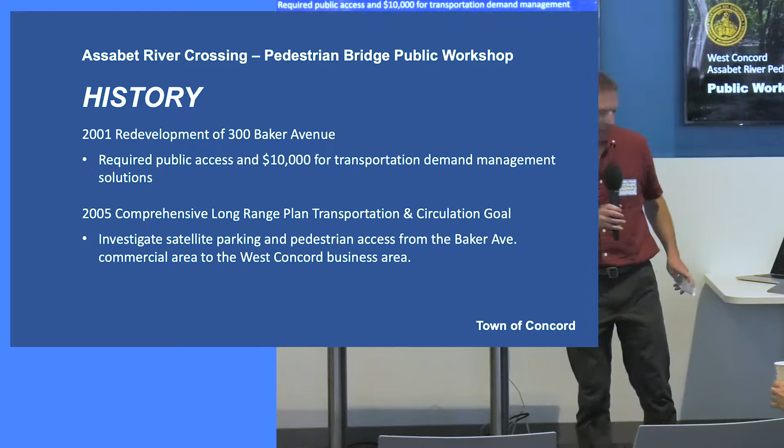So this is the part I agreed to give, just a few slides on history. How did we get to this point?

This is not necessarily a new idea, although it may seem new to many of you who are just coming to this, but as far back as 2001, when this site was redeveloped, some forward-thinking members of the town staff and the community had the wisdom to ensure that public access was retained along the banks of the Assabet River, as well as a conservation easement.

Even back then, there was thinking that perhaps some connectivity between this site as it got developed and the West Concord Village would be useful. So they retained that conservation easement and public access, and they also were able to negotiate $10,000 in funding for transportation demand management. I'll talk a little bit more in a minute about where those funds were used.

But a few years later, in 2005, Concord, which periodically does a comprehensive long-range planning process, revisited this goal of thinking about transportation and circulation goals between the village center and this site.

And they actually expressed a specific goal around looking into funding for a feasibility study. Again, in thinking about perhaps at that time satellite parking for the village center over here, and pedestrian access for the Baker Avenue development and the commercial areas of West Concord.

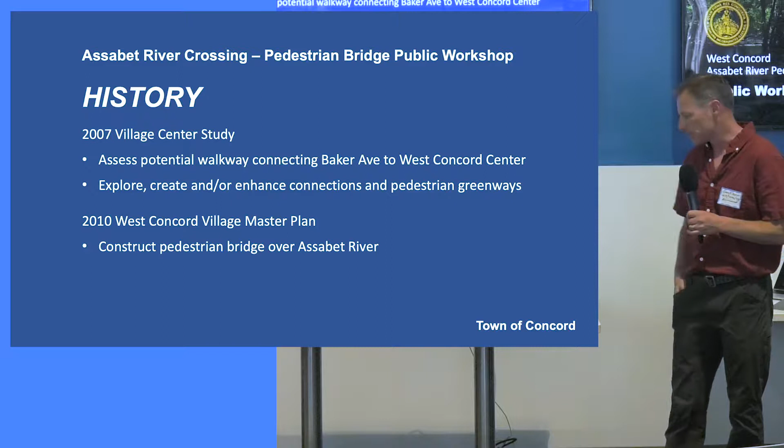Now in 2017, just a year ago, you remember I was talking about some funding, the $10,000 for transportation demand management. Well, we finally put that money to use and did a feasibility study.

This feasibility study looked at a 1,000-foot stretch of the Assabet River between Baker Avenue and the West Concord Village, identified 4 potential crossing locations, looked at a range of different bridge options, a trestle bridge, a truss bridge, a beam bridge.

And basically explored in this feasibility study some of the trade-offs between the number of footings that would be required for each type and the costs, ranging from between $2 million, $3.6 million. So a lot of considerations there, but we had the feasibility study done.

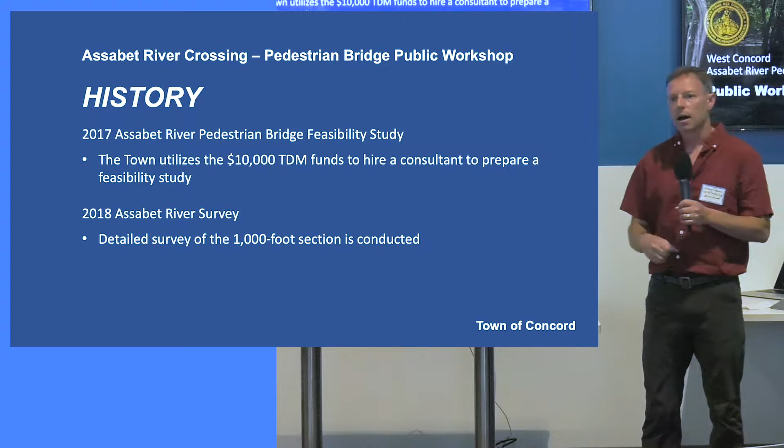In 2018, building on that work, the town did a detailed river survey of this same 1,000-foot stretch of the river to basically understand exactly where footings would be required, with detailed topographic surveys of the depths at different locations along the widths, the areas of wetlands, and where access would be more challenging and easier.

And then, of course, also last year, I'm sure everybody is aware that the Long Range Plan Committee published Envision Concord Bridge to 2030. And in the open space section of that plan, we again included some specific goals around ensuring that the village centers were connected to open spaces.

Along with a specific recommendation to pursue funding and achieving a pedestrian access between Baker Avenue and the village center, we also looked at connectivity along village riverways, including the Assabet River here in West Concord and Mill Brook in Concord Center, the Mill Dam area.

So I think that's the end of the history. I'll just end on this slide talking about where do we go from here. The next steps, obviously, now that we have a feasibility study, what would be a final design?

Develop the construction drawings, permitting. We have some estimates for the cost of that. The plan is to tap the community preservation funds, the CPC, to try and take us to that next step. And then, of course, construction would require a significant fundraising effort.

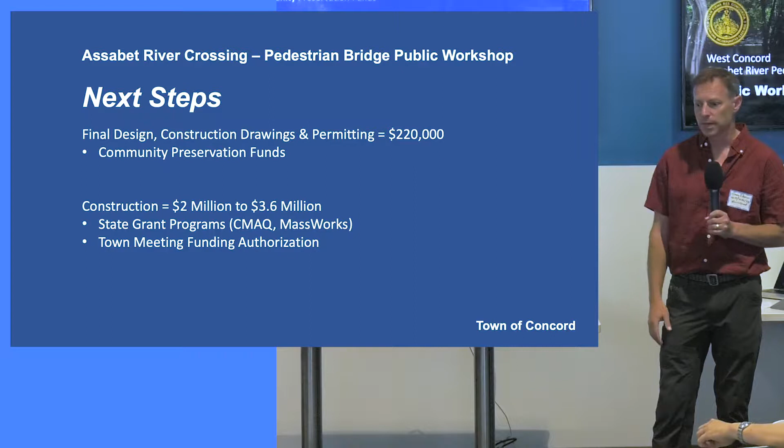But I think, to the extent that we can leverage state and federal grants, that would be a better way to try and fund this. But we're always open to private gifts if somebody happens to have an extra couple of million or knows a company or corporate sponsor that wants to bring this vision to fruition. That would be wonderful.

So I'm going to stop there and hand it over to Grace and James to take it from here and talk a little bit more about what our next steps might look like.

Great, thank you. Oh, I don't need this. Okay, let's put this over here. They've hooked me up with a... I'm wondering if you can hear me though. Is it? Am I projecting all right? We have lav mics. Okay, can you hear me? Is that okay? A little louder? Okay, well, I'll raise. You can also come closer.

So I will just introduce ourselves. I'm Grace La. This is James Dallman. We're both partners and co-founders and principals of La Dallman Architects. Our practice began in 1999.

Just to tell you a little bit about us, we came to the Boston area in 2013, where we opened our Boston branch of our office, which is now the headquarters of our operation for architecture, urban design, and infrastructure. Part of the reason that we came to the Boston area is we actually did our graduate work and my undergraduate work at Harvard University, where we actually met.

And since that time period, in 2013, when I arrived, it was partially because I was invited to be the director of the architecture programs at Harvard University's Graduate School of Design, where James and I have both been teaching since.

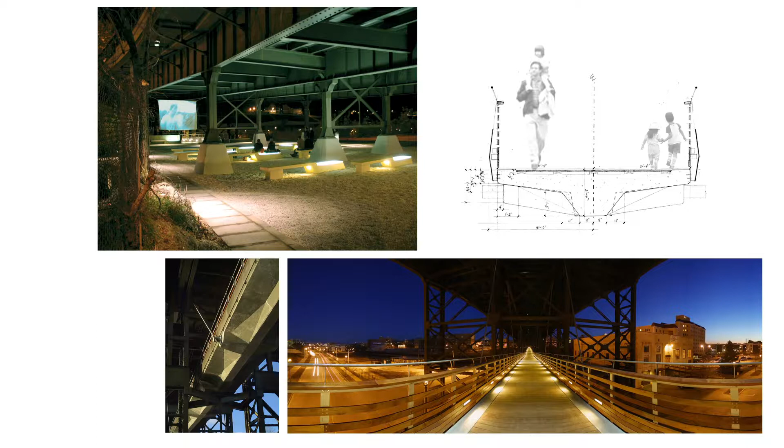We've done several bridge projects. Again, it's been something that we've been very interested in. And in fact, this project here, which is the Marsupial Bridge located across the Milwaukee River in Wisconsin, was funded in large part by CMAQ funds.

So we have been very engaged in the process of helping communities actually also find that funding. We know that these are expensive projects. But I think there are resources, and we've been very successful at assisting with the grant writing process as well, because a lot of the material that we will share with you today will work into a document that could actually become the working documents that we put forward for any grant funding that you might pursue.

I think the major goal of many of our projects has been to seek a very powerful symbolic sense of civic space and belonging as part of our mission of our practice. So it's kind of self-evident, but the project objectives include this connection.

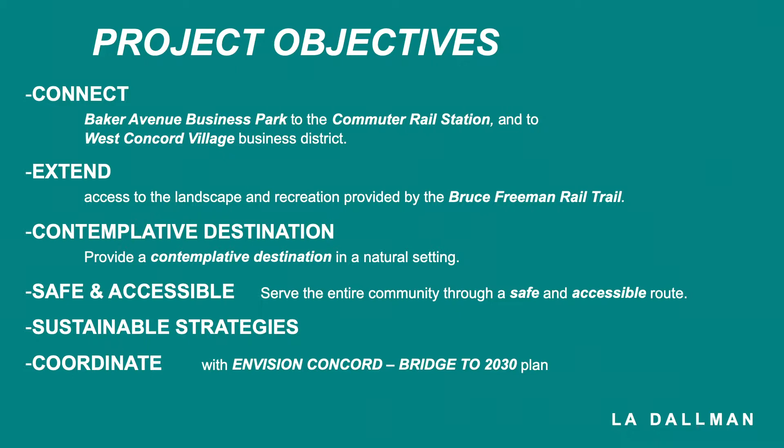This very important potential connection between the Baker Avenue Business Park, the commuter rail station, and the West Concord Village Business District, extending access to the landscape and recreation provided by the Bruce Freeman Rail Trail that's now been put in place, to create potentially a contemplative destination, a place to get away, a place to get into nature, make it safe and accessible. That's very important.

Bridges can be seen as kind of off the beaten track, so they should be made well illuminated and feel very safe and open. Sustainable strategies should be involved to the greatest extent possible, but in particular, when we make better connections for pedestrians, we're improving quality of life, but also creating more sensible commuter possibilities.

And to coordinate with the Envision Concord Bridge to 2030 plan, to make it integral to the community's vision for the future.

Some Concord context - we noticed that the website features a bridge, I think it's the old North Bridge. There are demographic shifts going on in the community that we want to respond to in terms of change in age of the population, but also a kind of fit between development and workforce and access to the surrounding amenities on the site.

And in particular, to this sense of connectivity to the West Concord Village Center. In response to the Envision Concord 2030 plan, this notion of balancing change with tradition, responding to a thriving community that is changing, and in particular, evolving transportation needs and connectivity.

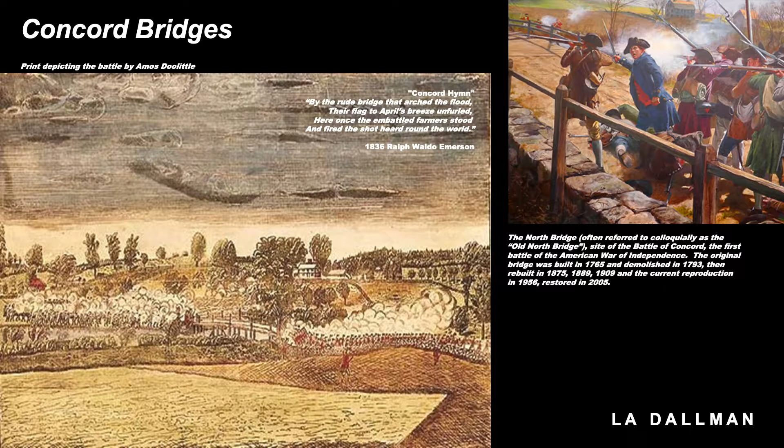Concord bridges are part of, I think, the ethos and history of the community. There's a kind of consistent presence of bridges throughout the community, crossing small waterways and roadways, but also part of the history of Concord itself.

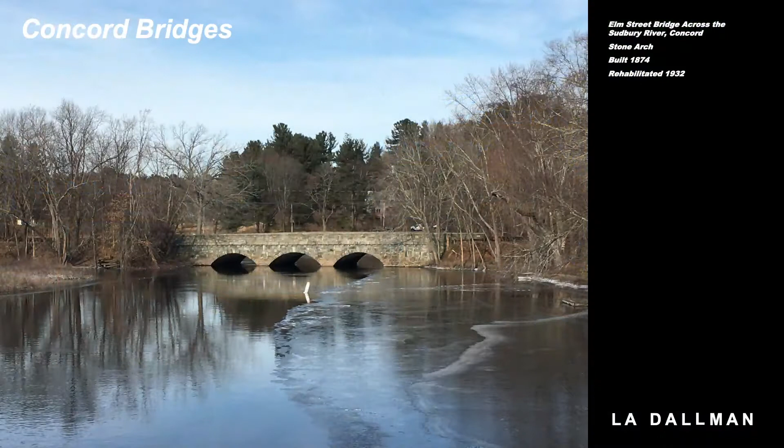That's the North Bridge in various manifestations - it was rebuilt 4 or 5 times. It was fun for us to survey and catalog the kinds of bridges in your community, to get to know the full range and actually the varied types, from stone arch bridges to steel bridges.

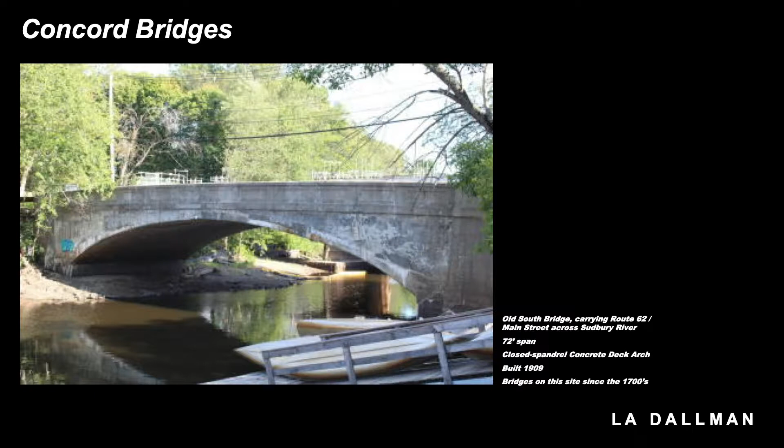It's been an interesting... so railway bridges from the 1870s, concrete structures, and timber as well. So there's every type of bridge, but I think we all know that this part of the community is not well connected in this immediate vicinity.

So some existing site information that we think is very critical to this process, that's based on the feasibility studies and the Bruce Freeman Trail.

So I need to raise my voice a little bit. Yeah, it's hard for me, so I'm sorry. I'll try - is that better?

The Bruce Freeman Trail is a very interesting connector through West Concord, providing access to recreation and natural landscapes, and obviously connects directly to the commuter rail and to the center of town.

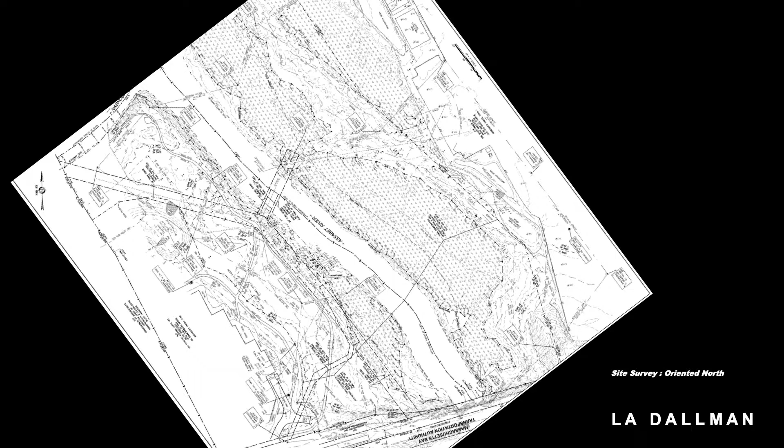The area of interest, of course, is here between this building and West Concord Town Center. The survey work that was done was very important to unleash the sense of the constraints, the parameters, and the opportunities for where best to place crossings across the river.

And we looked at various cross-sections and placements of potential bridges along that cross-section of the Assabet. It's obviously a very beautiful destination that changes throughout the year, but it's also full of wildlife, clearly. This is a view across one of the potential crossing points for a bridge.

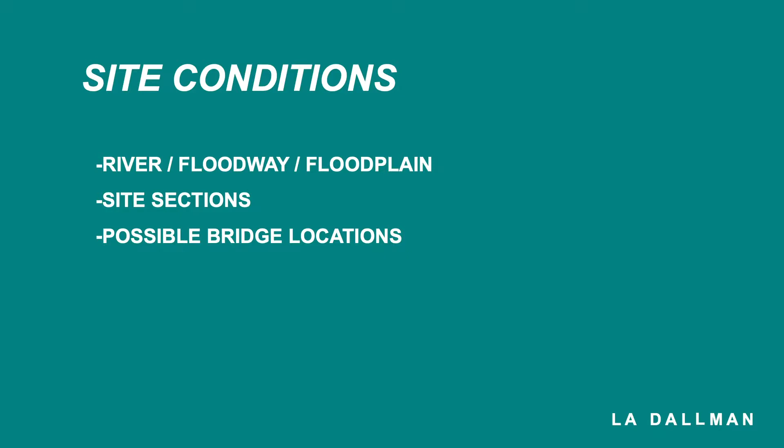So we looked very specifically at these site constraints from the survey, which are the kind of starting point for designing any bridge on this site.

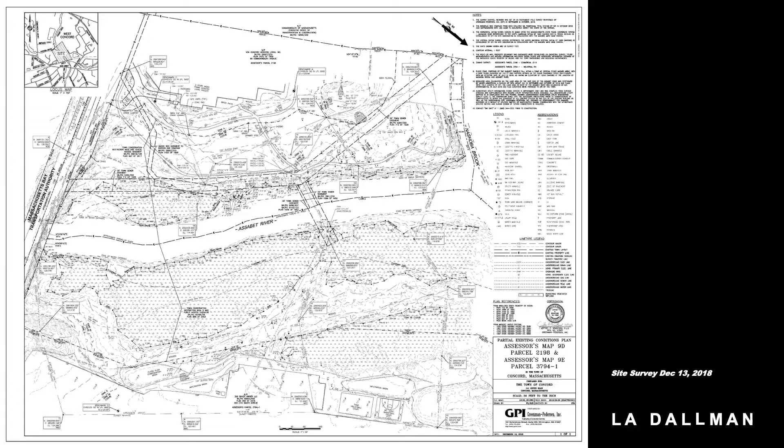So what we did was, this kind of site survey is often a little bit difficult to read, so I hope that this might clarify some of the existing conditions. We've built up in layers a kind of graphic mapping, just to get a sense of where north is - this way on this particular one - we're going to actually shift at a moment the orientation of the drawing.

But of course there's the river itself. Then there's bordering vegetation along each of these, which is outlined here. These are the defined wetland areas. And of course the tree canopy.

100-foot inner riparian, the riverfront floodway, area for habitat, riparian habitat. I want to show you.

This is at the mean annual high water mark. We're going to revisit this drawing a couple of times because it's quite important. This area defines what we're referring to as the floodway. And the floodway—of course there's the river itself—but the floodway is the area outside of the river where you will have intense water flow.

I'll point out that the commuter rail is kind of a nozzle, a point of constriction of the flow of the river. So at that point, the floodway becomes very narrow but also very intense. As it stretches out and spreads over the site, it broadens. This becomes a critical issue because though the floodplain is much broader than the floodway itself, the floodway is where the most intense hydraulic pressure is during a flood event. So that's the area we need to keep most clear of any obstructions.

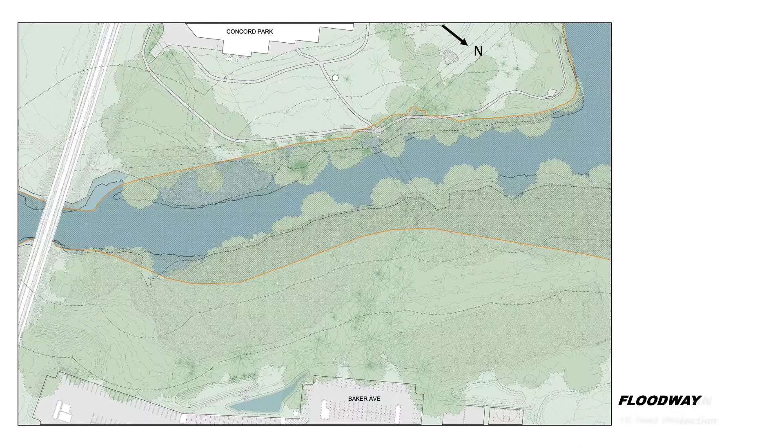This is a kind of plan diagram of a 10-year flood, and then of a 100-year flood.

So, sorry, just zooming in and looking at the village itself and the surrounding areas. This was from the master plan. You can see the location of the 4 possible bridge sites—one next to the MBTA, 2 more further up, and one at the very neck of the Assabet River where it meets the Nashoba Brook. So those were 4 obvious possible locations spread out across the site.

But in terms of access from the village, there are some key points. Along the commuter rail to the south edge, straight across the main new set of developments and the drive that passes through that site, and then further north, just before the Nashoba Brook, where the Bruce Freeman Rail Trail meets the Nashoba Brook.

From this side of the site, there are potential connections you could imagine all along this edge, but there's one that's particularly prominent, which we'll describe a little more with some photographs. There's a very clear shot through the forest, essentially from this point in space all the way through to the Assabet River, which is a clearance that was made for some sewer lines—I believe it was cleared for that purpose when they put the sewer line in, but it is a very clear path.

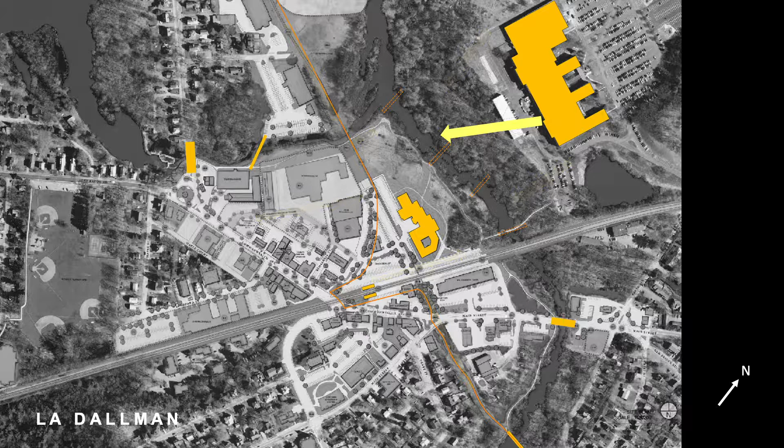If we focus on this side, from this vantage point—if we were standing on that deck looking out towards the Assabet River—you can imagine yourself moving in a pretty straight line past the parking lot, out into the forest, and through this clearing, this line of clearing in the forest that leads all the way to the river. So that's one potential route from this vantage point.

If we turn around and go to the other side, this is the connection point that might be right at the Nashoba Brook, just where the Bruce Freeman Trail crosses the Nashoba Brook and leads through that conservation area.

If we were to imagine those 2 connections meeting in the shortest possible route, it might look something like this, where you'd pass through the conservation area along the river edge, cross at a relatively short crossing, and then move in either direction, making the shortest distance between 2 points.

Another possible route is based on the southern edge. If we imagine moving across the edge of the commuter rail line, and then from this vantage point, moving across the edge of the parking lot towards the south—those are the 2 views one would get. It's a pretty straight shot, which would end up in a bridge across the southern edge of the site near the commuter rail line.

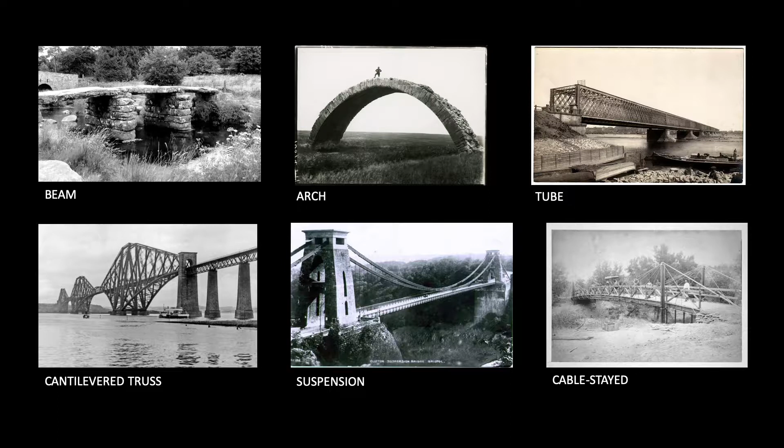We tried a number of bridge concepts, thinking through it. There are, of course, many different structural types one could use and think about—you have your own catalog of these in the West Concord region. The feasibility study identified 3 types as the possible options. The 3rd type, the trestle bridge section, we eliminated because it would require so many foundation points into the waterway, which is not good for the floodway issues and wouldn't make sense.

However, these 2 strategies, in which there's either a beam connection or a truss spanning, seem to be optimal structural strategies that we could begin to think about.

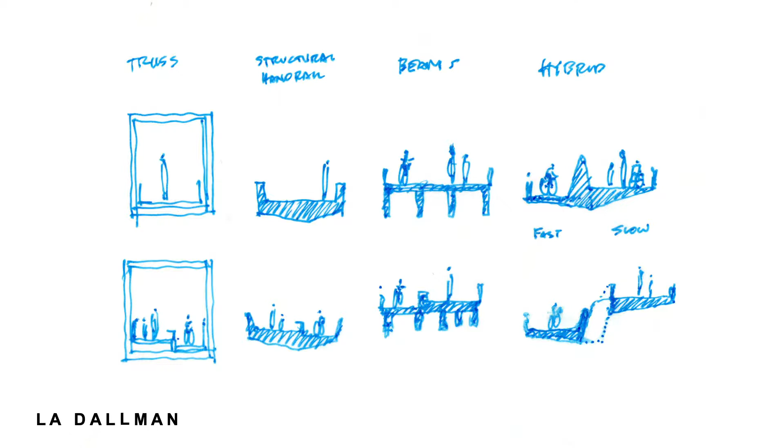If you take the cross-section in the other direction, the different structural strategies result in different kinds of cross-sections in the short orientation. A truss would create a little bit more of a volumetric expression of the structure, but it's actually low beneath the deck. In others, you would get much more depth, and you might need to raise the bridge a little higher. So the choice of structural strategy really affects both the aesthetics and the quality of the bridge, its height.

So what we did was, given that we were preparing for this workshop with you, we looked at 3 different strategies which attempt to look at different structural approaches so that we could elicit from you your thoughts and the pros and cons of each, and also test different sites.

So again, these are the 2 that we thought were the most optimal in terms of thinking about how we might approach a bridge project.

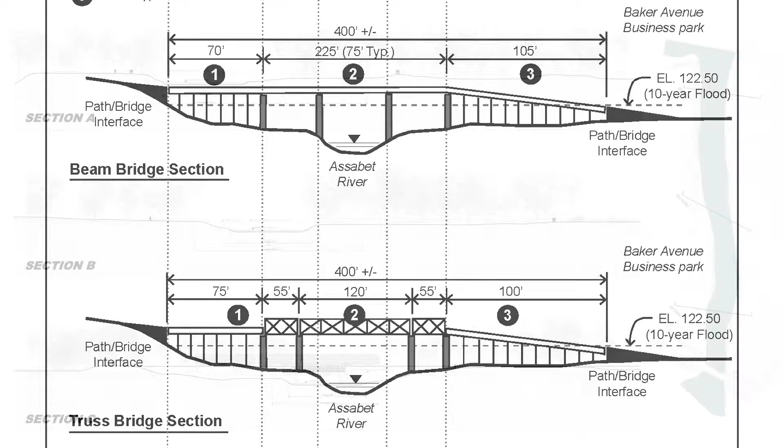And then when we look at the sites, on the right-hand side, you can see an actual plan of the river at this location, and these sections correspond to different points of the river.

What we'd like to point out is that when you look at section A - it's kind of hard to see here - this is a cross-section taken very close to the point. Maybe you could just point out where it is. One of the challenges of that location is that it produces the largest floodway span at that location.

So what we thought was perhaps we should focus our study on the other 2 possible locations for the bridge crossing.

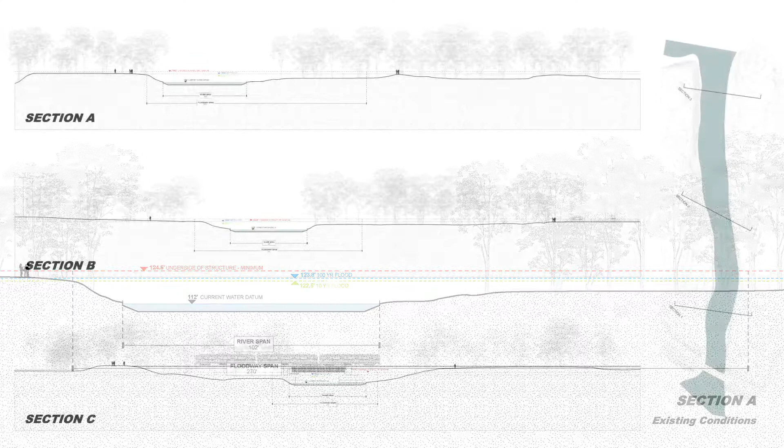In other words, we're ruling out crossing the Assabet close to the Nashoba Brook because it involves such a broad floodway to traverse that it's going to create more problems with regulations, but also structural spans. It becomes the longest bridge in a way.

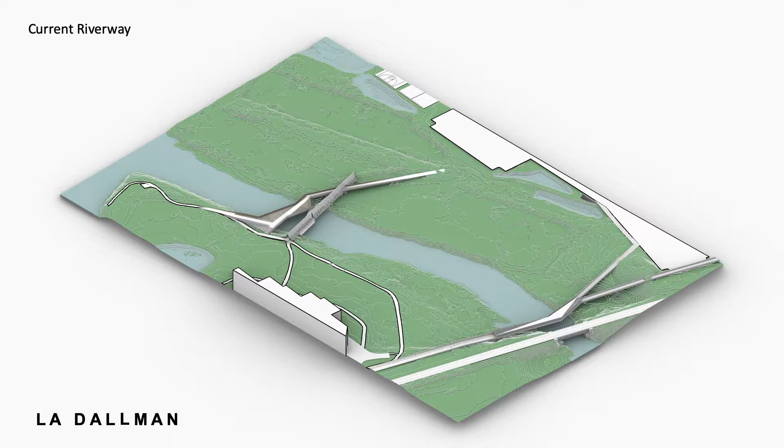So again, this is a kind of 3-dimensional view of the site. What we did is we focused then, as James is saying, on these 2 areas because of the floodway.

Next slide. So this is the commuter rail line - that's that neck in the floodway. And you can see how it gets tight here and spreads out and gets even broader as it goes further north.

And so these became the 2 locations that we started to study for the bridge schemes that we would like to share with you today and get your feedback on.

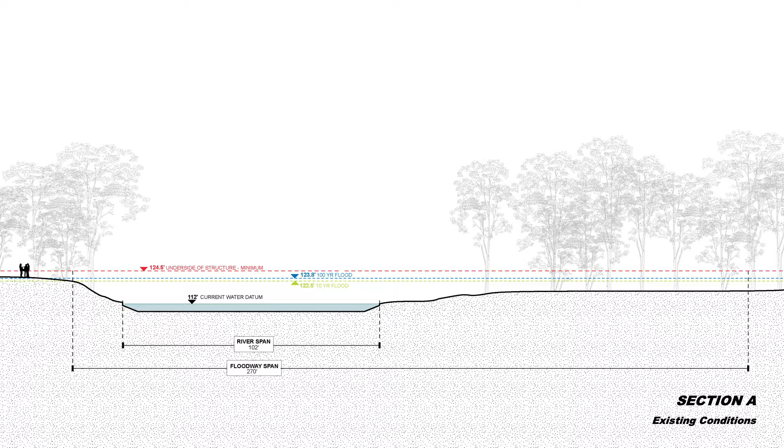Just to remind us that the floods are pretty intense and quite high. The other thing we should point out quickly is that this red line is a very critical line - it's the line above which we have to keep the primary span structural components of the project. So the underside of the bridge always has to stay above that red line to keep the floodway clear.

What is that red line called? It's just the underside of structure minimum. It's actually higher than the 100-year flood. It's a calculation based on the floodplain level, but then some clearance for debris. It's approximately a foot higher than the 100-year flood, 1.5 feet or so.

So the blue line is the 100-year flood - it's very hard to see, but in the printouts in the back when you get close you can see it. The blue line is the 100-year, and this lime green line is the 10-year.

So you'll notice when we show these, we'll have cross sections that show the structure. So when Grace pointed out a truss bridge puts most of the structure above the walking surface, that structure can actually be physically lower in space than a bridge that has most of the structure underneath the walking surface, which brings the walking surface up higher. We'll use the designs as a way to describe that.

So we're going to now talk, without that long introduction, about 3 possible schemes using those 2 sites. The first two schemes are on the northern site, kind of midway. Now, these are nicknames for the bridges, just so that we can identify them.

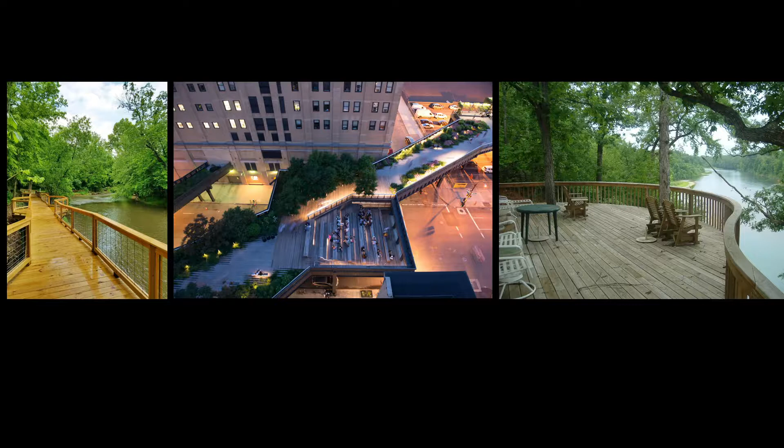Assabet Landing is based on the idea that the bridge itself could be more of a landscape feature, a gathering space in addition to a crossing. So it wouldn't be a purely linear condition, but a little bit more generous in terms of being a place to stop, a place to spend some time, to fish, to gather, whatnot. It's more related to the surrounding landscape, and also means that most of the structure is underneath the walking surface.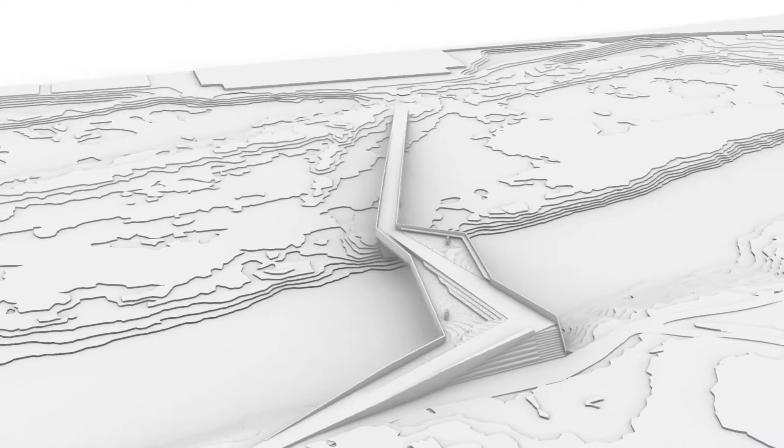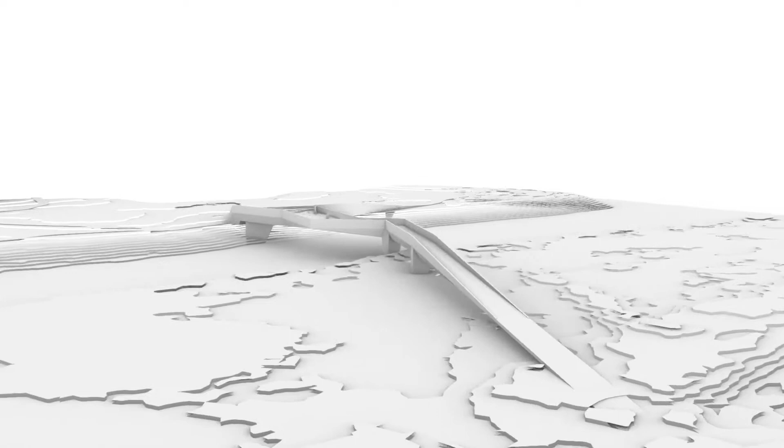So this is a really quick fly through without any materials. But you can see the obvious path that's ramped, so everything would be ADA accessible, as every bridge should be. That's a fundamental parameter for all these projects, that anything would be fully accessible. This kind of configuration would provide overlooks that are off the path, and feel very open at the same time.

These bridges, these 3D models that we're going to show you, have absolutely no material capacity, partly because we haven't actually— we'll show you some renderings of the things, but the 3D models are studies of shape and form, so they are absolutely intentionally devoid of material palette.

So this is a view looking at the bridge from the landing as one approaches. Again, it's subtly sloping up, but it does have to reach a higher level to get that clearance underneath the underside of the structure, for that clearance to be maintained.

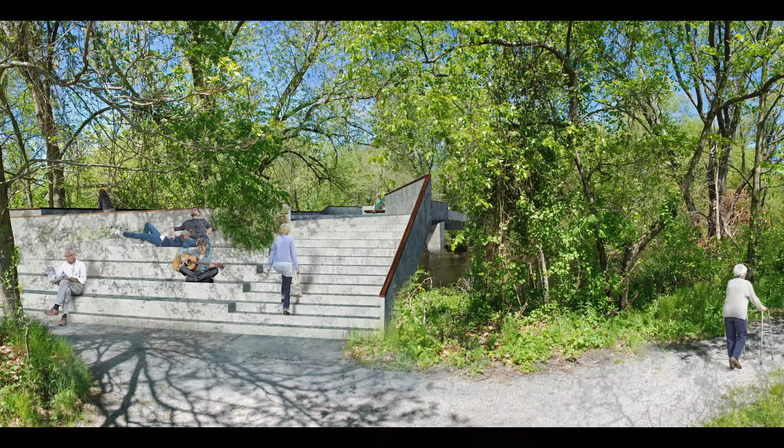From the other side, there could be a small amphitheater and steps that lead up adjacent to the ramp, so it would have both ramp and steps, giving two ways of getting up. And from above, it would have path and gathering space.

The proposal for materials, the suggestion for materials in this case, was a combination of the structural concrete that would provide the underside. And as you saw in our Marsupial Bridge design, we've worked very extensively with wood. It is one of the areas of expertise in our practice.

The proposal would be that the larger areas where you're intended to sit, touch, and gather, have lunch, would be made of wood timber. We used ironwood in the Marsupial Bridge, which was very effective both for maintenance and durability, but also because it had warmth, a warm palette.

I think what's important is that this is the beginning of a process, not the end, and it would involve detailed engineering that would help determine the final outcome of material choices and span types. None of this would be in a vacuum—we have to work within constraints of materials and technology available today.

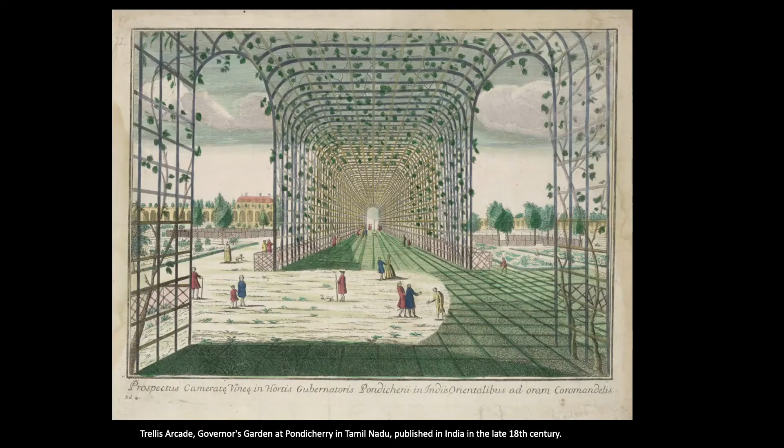So that's the first scheme. The second scheme we're calling the Assabet River Trellis. It draws on the history of trellis arcades—actually more of a picturesque landscape device used in the past. This example is from India in the late 18th century.

It also looks at the New England covered bridges found throughout this area, where the structure is a truss structure, and these bridges were often covered not only to protect them from weathering but also to give a sense of enclosure. We tried this scheme because we thought the lattice work could be quite beautiful and volumetric, and give an opportunity to bring vegetation into the project.

As a reminder, if the truss structure is above the roadway or footpath, we get more clearance underneath and can drop it closer to the minimum height above the floodway. But of course, it creates a sense of enclosure, which is different from being completely open.

With these two access points on either side of the river, a straight line was possible, but we looked at a subtly narrow neck in the floodway at this location, and ended up slightly off that, which also connects to some existing paths, creating a taller structure that you pass through.

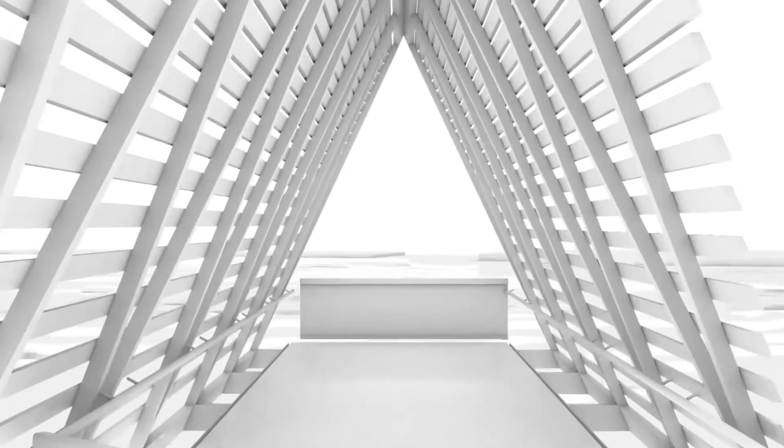This model view is just to show the kind of shaping. We haven't yet studied, because it's quite intensive, the amount of spacing between the lattice needed to make it porous and transparent. These are just quick tests to see what you could get and how you could manipulate the lattice to open it to certain views and create places to slide through and outside of it. This is just the beginning of this study, to give a sense of this strategy when the structure is above you.

I do have a comment. I think there's a real difference between that bridge and the old-fashioned bridge that has a sense of history, as you showed. You should really explore that, and I'd argue, to be correct, you should do a preference study—which would people prefer, the traditional bridges or that kind of wild-shaped one?

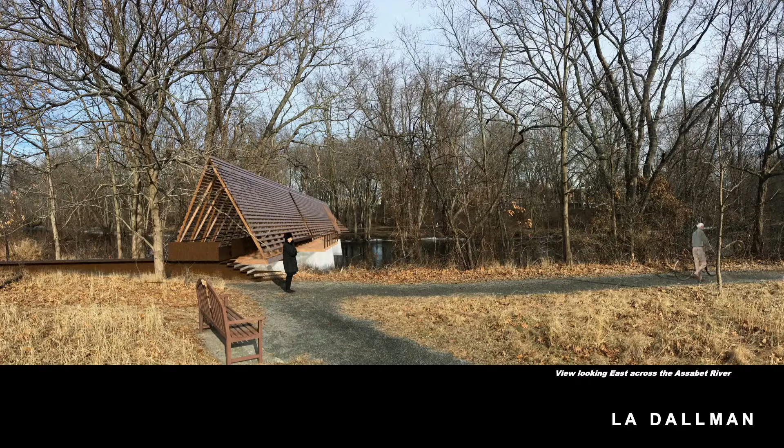Most people aren't trained as architects; you don't need 0.001% of the population to do the study. I'd argue the old bridges felt like Concord, and I can connect to that. What you showed feels a little off-putting and weird. I could be wrong, but for you to do this project, you need to do that preference study—that's what people do now. You need to understand the human, biological, emotional experience before you can say you're improving the public realm, and you haven't done that.

We're here to have conversation after the presentation too, because I want everyone to have a chance to talk.

The idea is that this puts most of the structure above and has a relatively lightweight structure that could conceivably be built off-site and lifted into place, creating the least impact on the site because it could be largely prefabricated, tying into some of the interesting history of wood fabrication here in West Concord.

We literally can't build buildings like we did in 1750—you just can't do that. But you can understand why those symmetries work, using modern neuroscience to understand why that architecture is perennial. The problem is asymmetry is harder for the brain to process and harder for the brain to remember. Yes, please.

There's a little bit of a crown in all of them. So in order to get as much site elevation as possible, we thought this could be arced slightly in the cross section. Right. Yes, keep going.

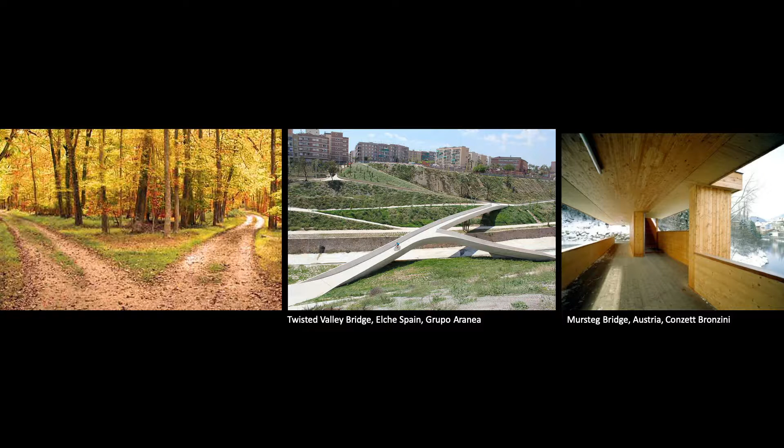So the third scheme, which relates to that site immediately adjacent to the commuter rail. Did you want to say something about this?

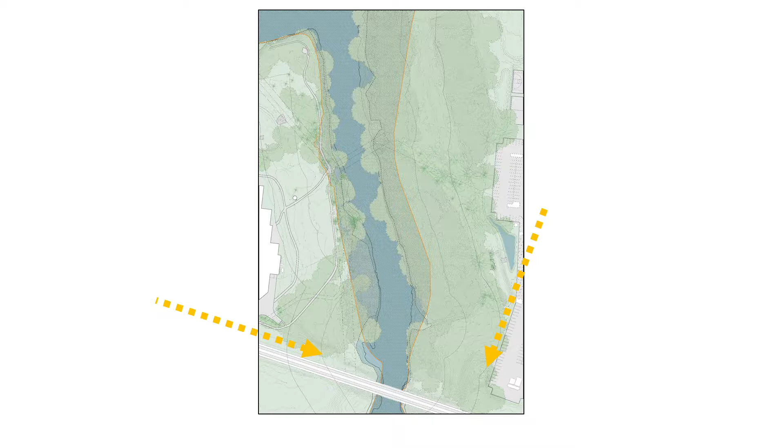These images just share some of the things we've been thinking about, because that site at the commuter rail location has an opportunity to gather different strands of movement and points of access across the site. Here again is the commuter rail, and as James mentioned, this is actually the shortest zone of the floodway, so it has essentially the tightest kind of spanning issue going on here.

But one of the things that was intriguing to us about this site, though it's parallel to the commuter rail, is the opportunity to connect to more locations. For example, it could veer off towards this business complex here, or be part of a potentially new bike trail system - many communities we've been involved in have had rails to trails and adjacent trails as saddlebags to rails.

So in a way, this is less of a destination, but more of a piece of infrastructure that connects broader areas in the region together more directly, and especially with bikes.

So here we were very sensitive to the fact that the bridge would actually be running alongside the commuter rail, and so one of the ideas was to create a kind of lattice structure along this edge to veil the view and sound and exposure to the actual commuter rail on this edge.

So that's why this bridge is actually quite asymmetrical in its quality, and it forks to offer those different paths of movement. There would be kind of a slow lane and a fast lane, so bikers could keep going through without intimidating people walking, strolling, or in wheelchairs.

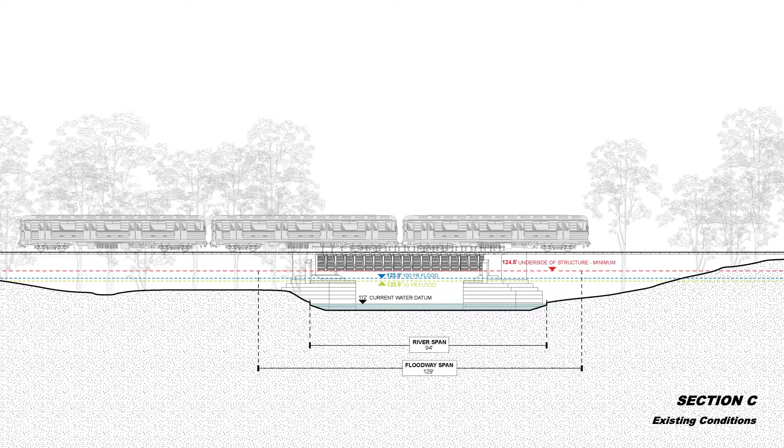But what would be kind of interesting is this bridge could tuck in next to the commuter rail and still allow the commuter rail to look out over the landscape.

Here's the commuter rail, and again, we just wanted to show you this volumetric study of how it's connecting.

So clearly one's first impulse would not be to put a bridge immediately adjacent to the rail line, but there are some real advantages to the span.

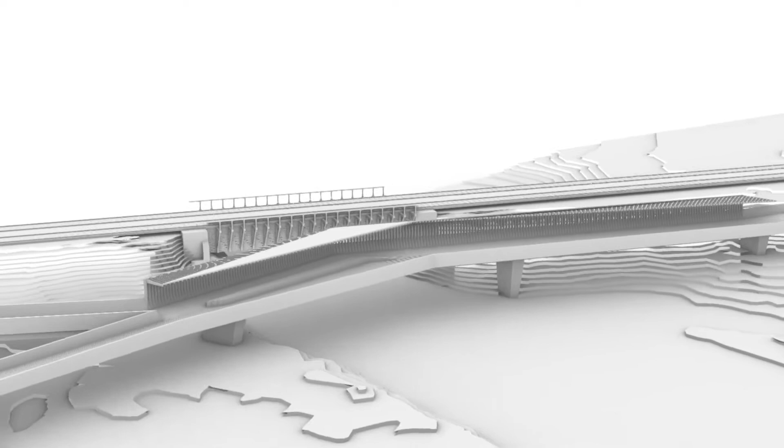If I could just finish for a second. The span that's available here is much shorter for the main span, so it can be very tight, and the supports can be close together, and the span is short. On the other hand, because of the terrain, this one has to stretch a little further.

So though it doesn't have to be as deep a structure, it has to go a little longer. We were thinking in this case, the lattice work that might be on one edge might allow the project to have a kind of interesting lenticular quality, where when you're looking through it, you actually see a clear view, but when you're looking at the side of it, it actually becomes opaque. So it was just an interesting thought about how we would continue to develop that as both a structural strategy as well as a visual one.

I think it's really important that you study what makes existing bridges in Concord that are on the postcards successful. One element you'll find is they have really human-scaled routes, so people aren't scared going over them. This is true of the Old North Bridge, and this is true of the little bridge going over Nashoba.

It's quaint. That's what people come to Concord to see. Quaintness and cuteness. And what you've shown is very scary. There's no sense of where a person is or how big the person is, and it looks like it's filmed from a drone. That's not what Concord is about. It's about the person. But even here in this design, you put stuff in, and everything looks like it's on a highway.

So this bridge, yes, sense of material. So I want to bring this back and allow people to ask other questions, because we're going to give people time to look at everything. This is day one, hour one. This is not it, and so the feedback is really great, and I think that was the whole purpose. So this is like barely your toe in the water.

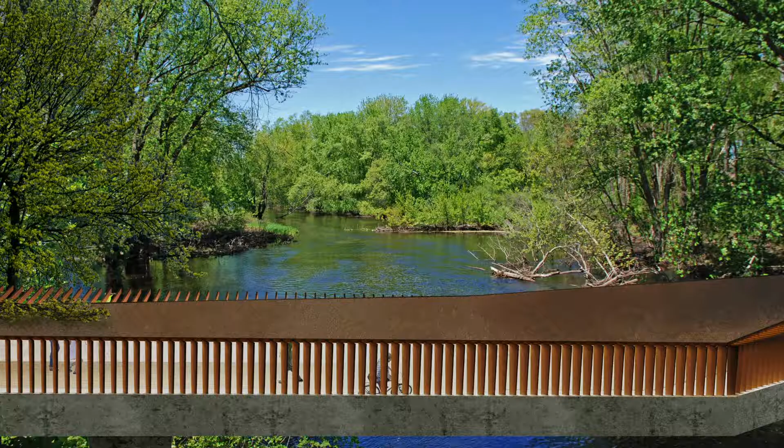But I do have a question. I just want to voice, I really appreciate the three options that you've shown, and they really raise a lot of interesting issues, like the issue of community gathering versus transportation, like just being able to get speedy in and out of the village. And I personally would be really excited to see a novel and interesting, architecturally interesting, modern expression for our village. I think that would be a destination. And the one thing I like about it being right on the train is it would be a landmark that you would see out the train window that you would want to go back and visit. And I think it'd be wonderful to do something with color.

Yeah, one of the things that we had imagined and talked about as we were working through this in the office was the question of how, for example, seasonally, things might really affect it. There might be lanterns hung from this thing at different times of year if you had a lattice structure, or if you had something that was a kind of canopy condition above. So we actually thought one of the goals would be to take your feedback and work through a single scheme in more detail, so that we can flush out all those potential ideas of how the community would author this potential bridge.

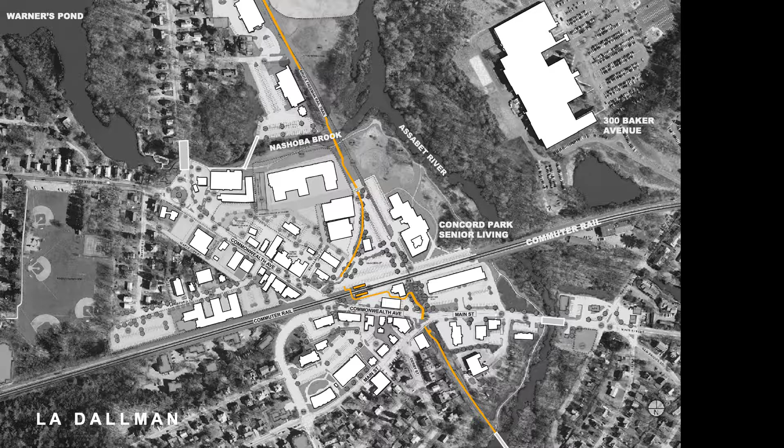Okay, I have another question regarding functionality. I'm curious about how you took into account Baker Avenue. There are a number of buildings on Baker Avenue from one end to the other. How you took into account what is likely to be easy access points for people working in those buildings to try to get to West Concord.

That's a great point, because when we visited the site a few times and looked at the other bridges and the site, we noticed that people were actually using the roadway as their circulation route for exercise and lunchtime gathering. It wasn't for us to say exactly how this site should be planned, but we imagine it would be quite nice in the green spaces to create more of a path network that would allow people both to get to a potential bridge and to traverse the parking zone. That wasn't part of our bailiwick of work, but I think it would be a great idea.

I'll add on to that, only because I'm getting a smile and a nod. The people that own the building, Novaya, has already started - this is sparking their interest, because you do see people doing laps in the parking lot. Whatever happens in the back here, working with and even connecting up behind the Marriott, and then coming across, really making a nice circuit path that gets the commuters who might work over at the aeronautics school or over to Emerson's rehab. So all of those people have been invited to be part of this discussion.

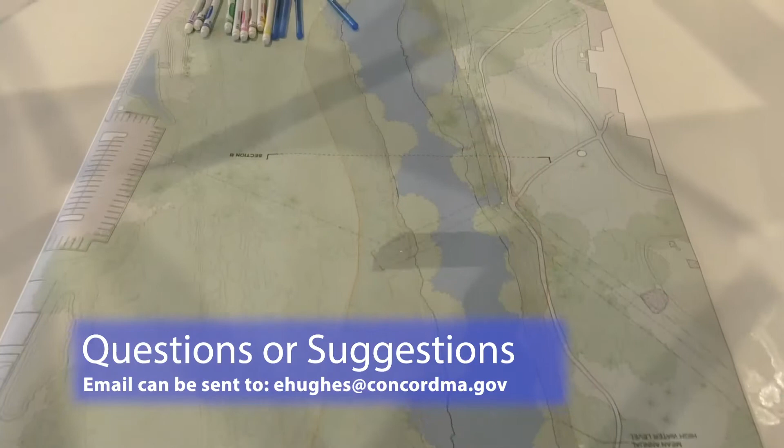It's much broader here, so there's a lot more sensitive terrain and flood hydrostatic pressure on a bridge here. This creates a little bit more direct connection here and still gets relatively close to it.

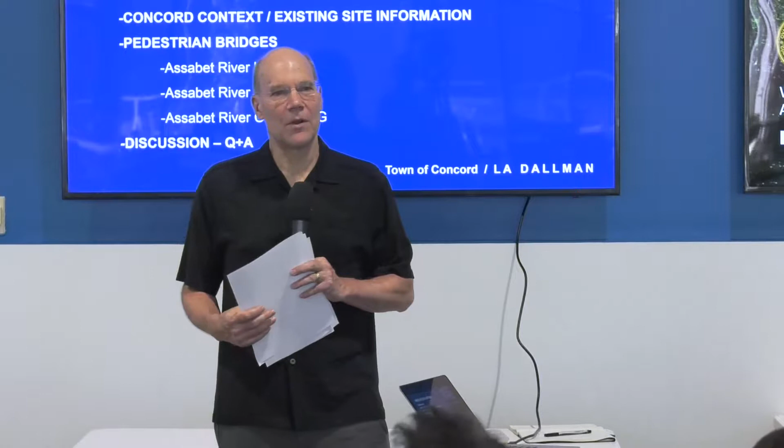So my job here is just to kick things off before LA Dallman takes over and shows you some of the exciting designs and ideas for this new pedestrian walkway. Just to give you a little background, how did we get here to this workshop, and what might be the next steps? Maybe I should review the agenda first.

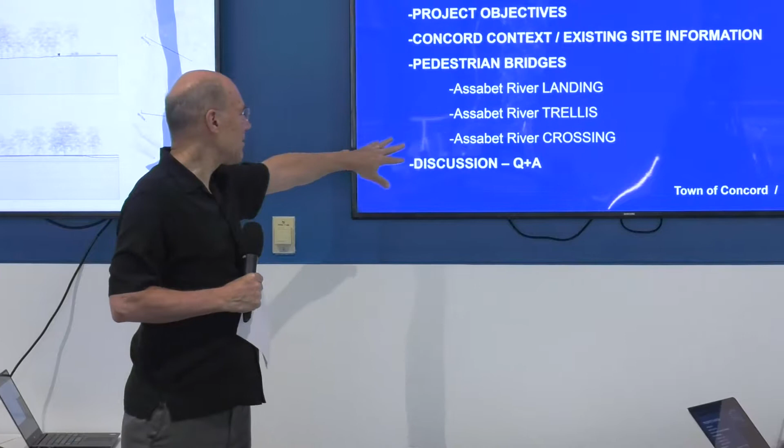So we'll talk about the project's objectives, the site information — there's been a survey done, so there's nice detailed information about the site — and then the possible different footbridge concepts, and then we will engage you in discussion and Q&A about these proposals.

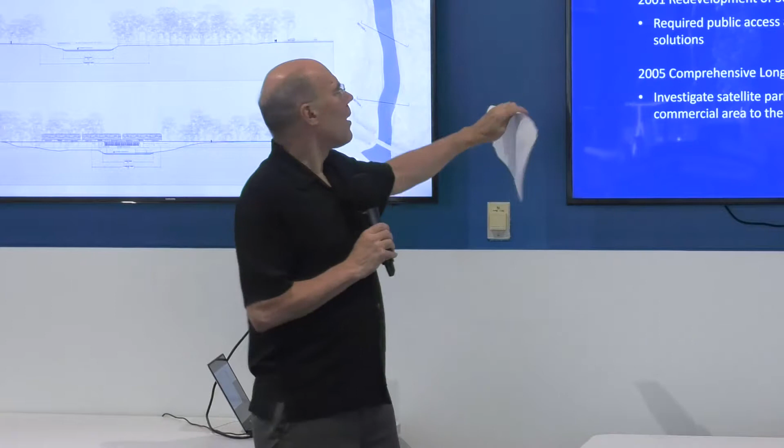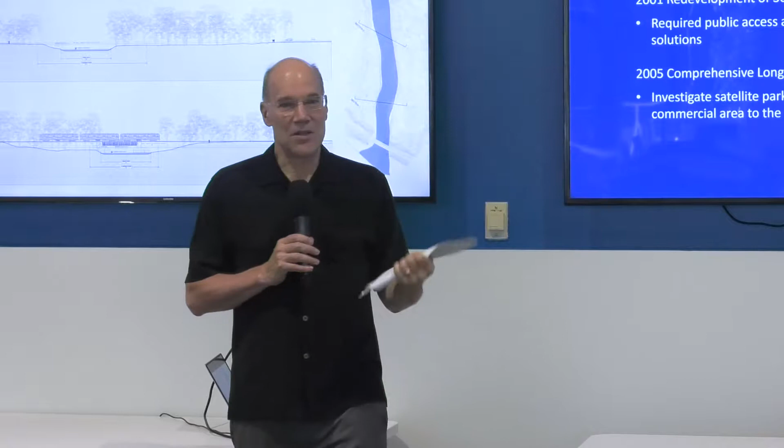Now let's move on to the history behind this. Like a lot of municipal projects, this isn't a snap-your-fingers-and-it's-done type of thing. It's not quite as long so far as the Bruce Freeman Rail Trail, which we hope will be completed very soon. But it does go all the way back to 2001, to the redevelopment of the 300 Baker Ave property. At that time, as part of the conditions of the permit issued for the redevelopment, the ZBA required public access to conservation land, as well as $10,000 that could be used to help develop transportation demand management solutions. And we'll see — they kept hold of that money.

We didn't actually end up using it for that, but we ended up using it for this much later on. Then in 2005, we had a comprehensive long-range plan that was done.

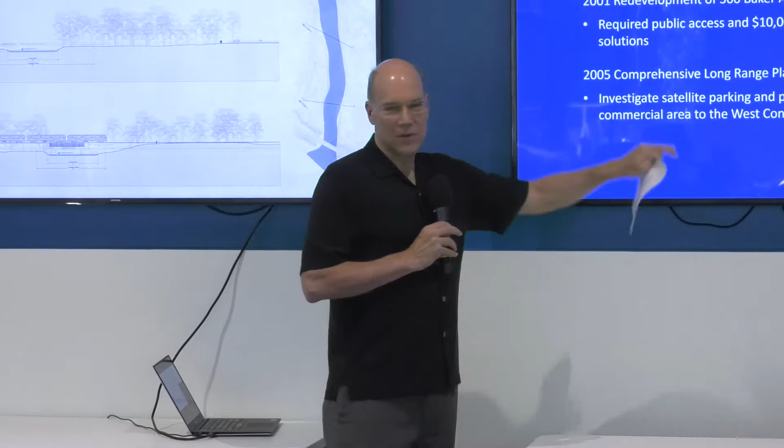In that plan, there was an idea to investigate putting satellite parking over here for the commuter rail, along with some pedestrian access to the commercial district. I believe the initial idea was to just create a cantilevered extension off the railroad bridge and just walk along there, which would be nice and cheap, but it would also be dangerous and would also require us to work with the MBTA, which is not an easy thing to do as a town when you're going on their right-of-way.

The next step was the Village Center studies. This was a document done for all of the different village centers with proposals for how to improve them over time. So while it wasn't specifically a comprehensive long-range plan, it was very much focused on our village centers, and it was the genesis of a lot of great ideas that have since come to pass.

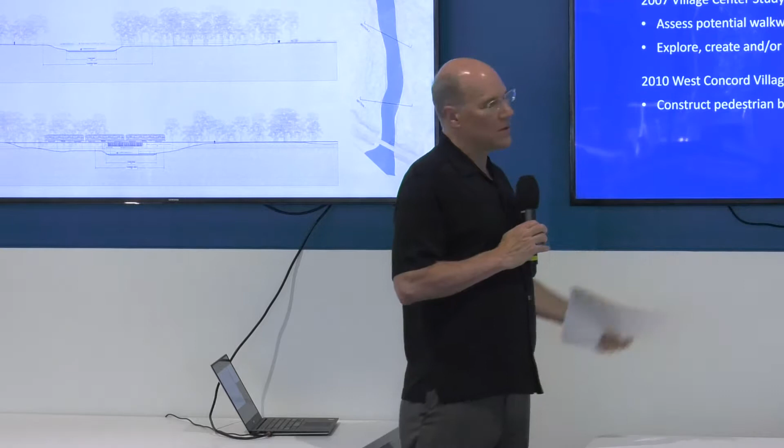That also included a goal to have a pedestrian walkway from Baker Ave to West Concord Center, and added another dimension to this. So rather than just straight satellite parking or pedestrian access to commerce, it also added connections and pedestrian greenways, taking advantage of the river resource that's there.

Then in the 2010 West Concord Village Master Plan, anticipating a lot of redevelopment that mostly now has occurred in West Concord Village Center, there was again reiterated the idea of having a pedestrian bridge. So lots of studies, lots of desire, but not much action up until this point.

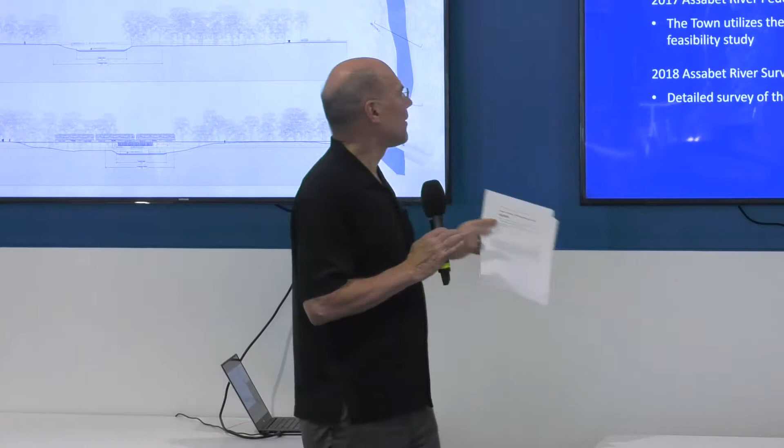Fast forward to 2017, and now things start to move on the ground. That $10,000 was sitting there all that time, and apparently not in an interest-bearing account either. So that was used to hire a consultant, and the consultant used that money to prepare a feasibility study.

Then in 2018, there was a detailed survey done that has, I think, informed some of the construction of the models and the plans that you see here today.

And then there was yet another long-range plan completed, and in that one there were very overarching goals for the entire town, a core goal to improve connectivity. So it bubbled up to being a very high priority rather than just a desire. And then the pedestrian footbridge, along with two other projects, really were prioritized as examples of the kinds of projects that could improve connectivity, and the one that was most associated with West Concord Village.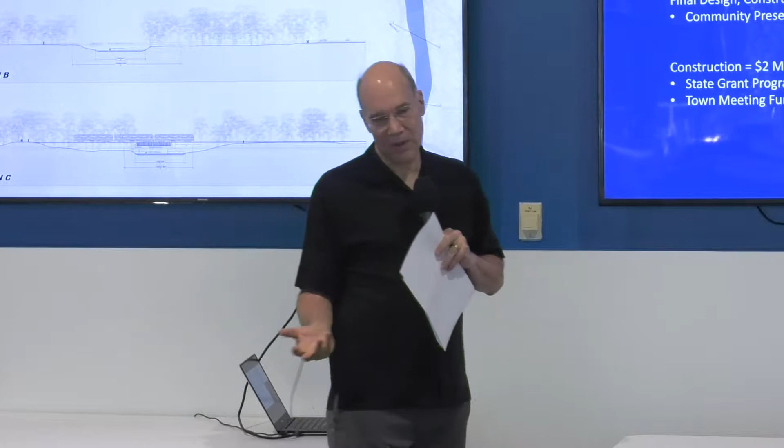So that brings us to what's next. Tonight you'll see some of the concepts that we hope will get people excited about this and move us to the next step, which would be to try to get design construction drawings that you could build from, and permitting so that you could build. The estimate is around $220,000 to make that happen.

Now that's still not a bridge, that's a nice possibility of really building the bridge. It's the kind of project that we can try to pursue using community preservation funds, but we'll also need other sources to match. And then to build the bridge itself could cost between $2 and $3.5 million, which seems like a lot of money, but it is what these things cost.

And it could be funded in part by grants, by also our own town meeting capital projects, though there are many competing projects at this moment. And then, of course, by contributions from businesses and individuals to get this done.

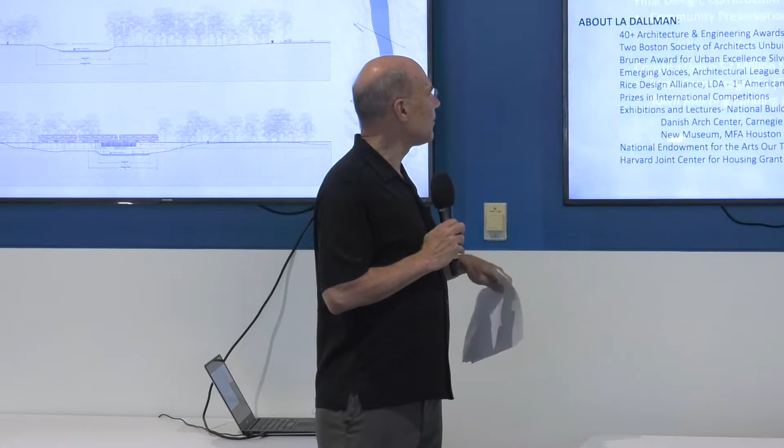So I think that takes me through the introduction, and now we're able to introduce our architects and see what this thing might look like.

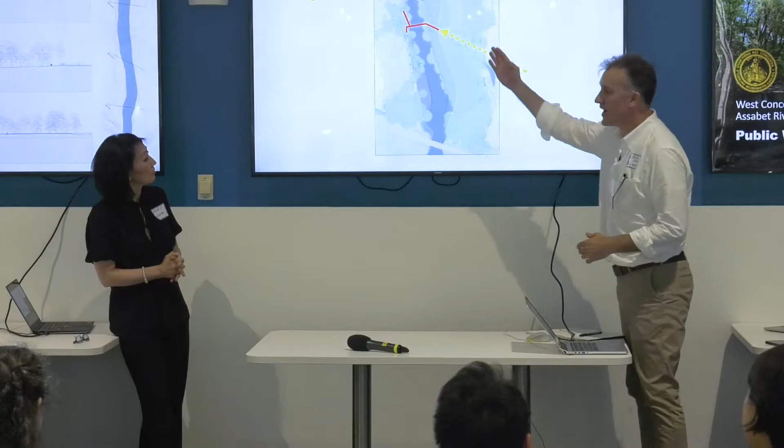We're looking at the shortest possible crossing of the floodway, and there's a couple of different orientations that could take: straight in line with this axis, or at an angle to make it even shorter. What we came up with for this scheme was a kinked path that would create shorter spans relative to the floodway, but also connect to the general directionality of the paths.

So it would follow the course of the paths that these two entrance points describe. In this scheme, when we realized there was some interesting negotiation of the lines of movement, we recognized we could create a path of movement that would do the work of the bridge, but also result in additional spaces—maybe for a fisherman, maybe to have lunch along that edge—things that would get you off the actual line of movement. We call it the landing because we thought it could act as a destination for the community as well.

This is the critical cross-section, the red line being the height below which we cannot place any structure in the floodway. We can have some supports, but the primary spanning structure has to stay above that line. In this scheme, because it's more of a beam bridge design where most of the structure is beneath the footpath, that has to be a little higher, so the footpath has to rise up a bit so the structure can be beneath it but still above that line.

That creates this opportunity for ramps at the end, so it's a more gradual connection. Everything would be ADA accessible, but it does have to have some ramps—any of these schemes have to have some ramping to get up high enough. But that's the kind of figure that results.

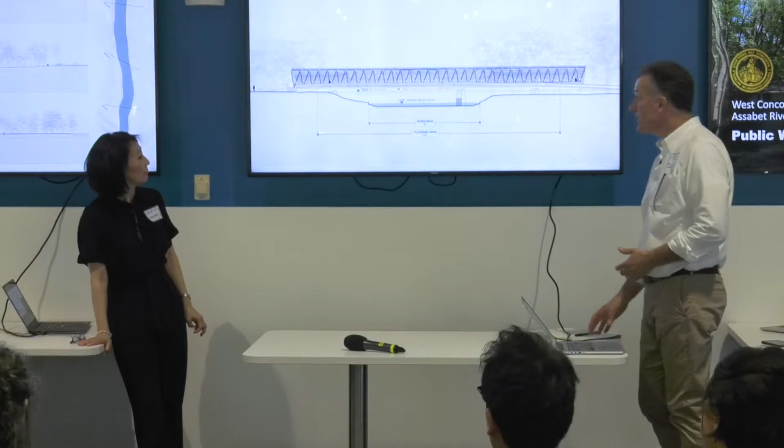So again, here's the cross-section we have to contend with. But because the structure is mostly above the walkway instead of below it, we can be a little lower, and the ramps don't have to be as long. So there are shorter ramps and steps at the ends to connect it to the surrounding landscape.

Again, this is a material-free fly-through without character, just showing the shape in the landscape. It has a couple of offshoots where you can step outside of the structure and look out towards the water, so it's not all contained within the volume of the truss.

We were, again, very early on, just at the beginning of exploring how that skin system and lattice might work—where it would open up, where it would become more transparent, and where it would be more about protecting the structure.

Looking from the West Concord side, looking back in this direction, you can see we're in the building back here. This could be situated in a way that was more building-like, because you can see structure above the walkway, but could also tie into these existing paths and create a more sheltered experience of crossing the river, while still being open enough to have views and some larger openings that completely open up to the site.

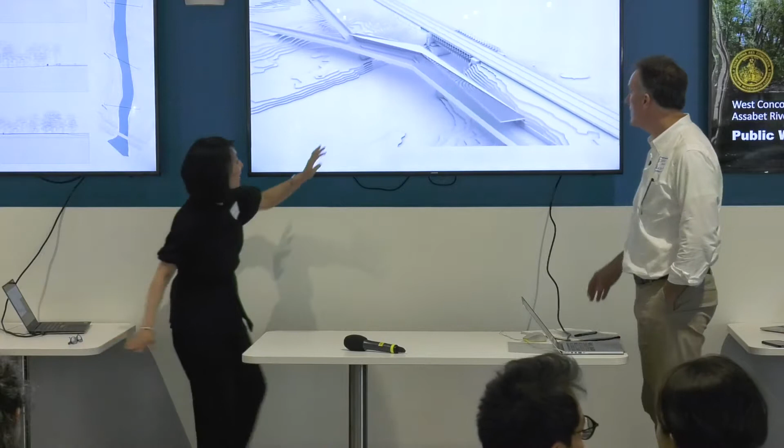Again, a fly-through with no material indications here, just looking at the form and the shape and the geometry. This was the idea of that lattice that might shield one's exposure to the commuter, but it changes as you move around it, so you could have views in some orientations and not in others.

And it's low enough that passing trains could still see, riders on the train could still see across it out to the landscape. But they would be aware of its presence as another route through the site.

And then here you can see the beginnings of the place where the two paths unite before they split off. And from the commuter rail, if you were on the train, you would see still that view, but this would be the pedestrian bridge in front of that view.

And then at night, we were quite interested in the quality of this kind of jack-o'-lantern effect, that you would have this glowing thing there. Again, we hope that in all of the schemes, the community would author the things that would happen on these bridges, because I think that they could be actually quite festive at different times of year for seasonal festivities and seasonal events.

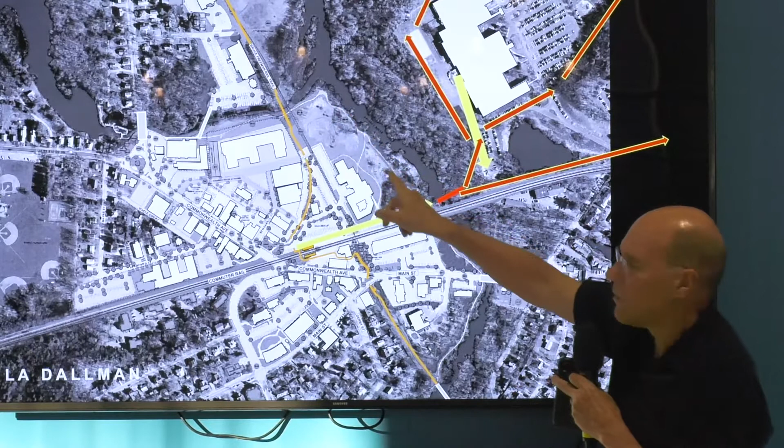Matt, you were referring to this section—that's right, the building there that you see outlined. So this building here is being extended a bit, and the parking lot is going to be extended as well to accommodate additional parking requirements. But this part is remaining the same, except this trail is going to be constructed to be similar to the condition that this part of the trail is in.

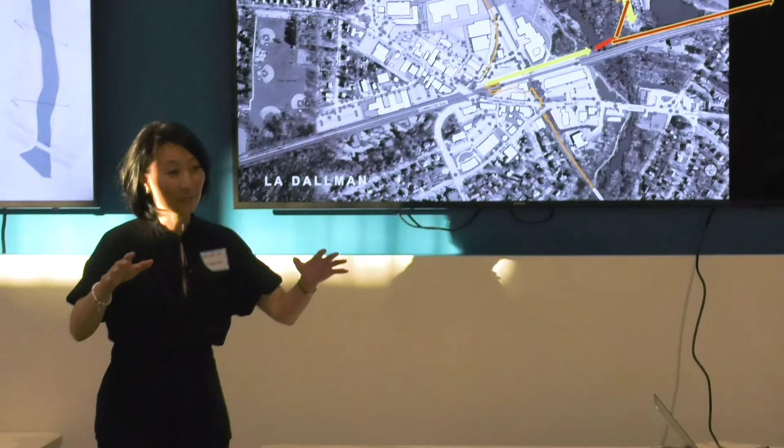Your question is so important because, not knowing the deep history of the sites and the various ownership, just trying to walk the area as an ignorant person was very helpful. What I was feeling as I walked the site, behind the assisted living, it does feel quite privatized. So when we were toying around with the exact orientation of the bridge, it was not only to find the best strategic opportunity structurally to shorten the span, but also to orient towards the natural direction of the path as opposed to pointing the view right towards the assisted living.

We weren't sure, especially now that this is going to be extended as well, so we were trying to be sensitive to how you would get to the other side and what you would be seeing as you get off the bridge or as you get on it. Those are very important and interesting questions for sure.

There's 1, 2, and 3.

I'm really torn between the first and third plans. The landing plan is far better for pedestrians, for social use of the area, for enjoyment of the wetland, for gathering spaces, for so many reasons, and I love the openness of the bridge. The trellis design seems nice for the small number of people it would accommodate as an outdoor room, but it's uninviting to people who aren't currently in the trellis—they seem shut out, like they should let those other people stay there and not come in. So I'm less fond of that plan.

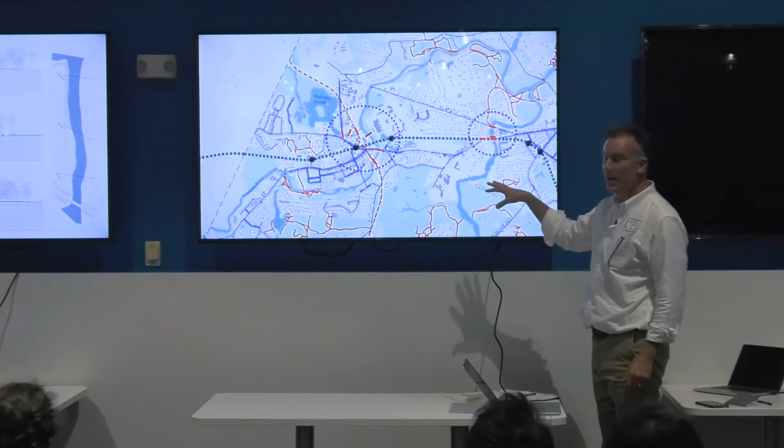I was also going to quickly go to a drawing that refers to what you just mentioned, Matt. This is a rough GIS plan of Concord and West Concord, and that right there is the bike trail along Elm Street, which I guess is the old route—Elm Street, yeah.

Connecting across through Baker Ave, through this site, could find its way up to that, to create a more direct route between the two. We could be thinking that way about that larger connectivity.

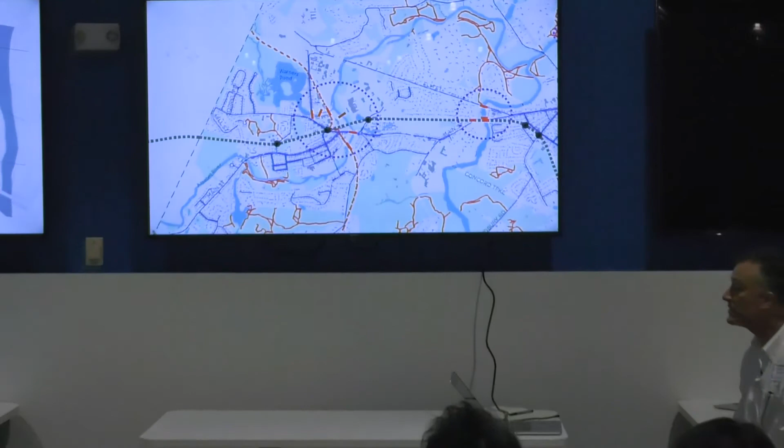It was graphically challenging to see this, but all these little red bits are trails that are disconnected from each other. I thought it would be interesting for you to see your region with some trail systems that don't actually connect - they're kind of isolated within neighborhoods or communities. As a long-term goal, this drawing was very interesting to us because all those red zones need to somehow get knitted together.

Is there a route that's possible that we're not seeing yet? Yeah, they look like little squiggles. That's exactly right. There's more than meets the eye here - this trail actually continues through over into here. It does stop, unfortunately, before you, and some of the property rights issues are pretty serious there.

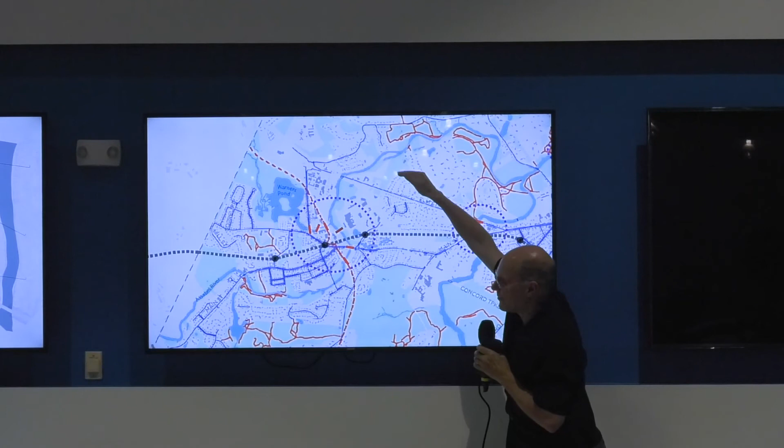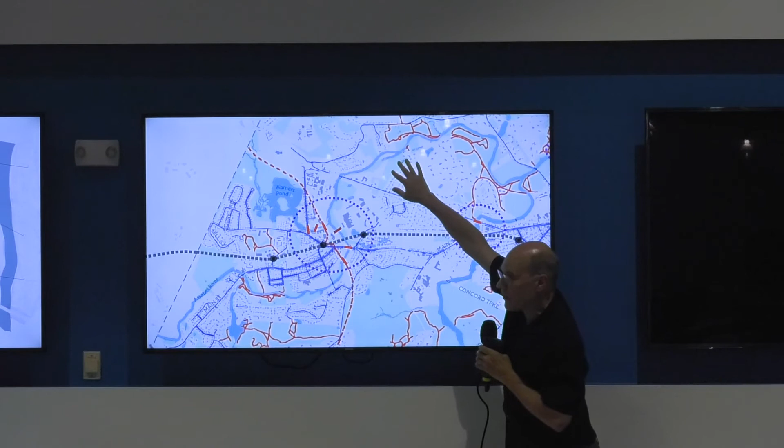Some of the right-of-way may no longer exist, but there are streets that then go into Elm Street. That would be ideal. Today, at least, it de facto goes all the way here. This is conservation land with trails. That would be the most attractive, wouldn't it? To go around the waterways - longer, but we're not talking about 50 miles here.

There's farm fields. Okay, you can go to here - this is as far as you can get. But even to here, then there's, I think it's Nimrod or something, the street that goes right to here. So there's a serious right-of-way issue that would have to be worked out to get there. But I'm just saying, there's a dream anyway, if not a hope.

Would you happen to know where the Reformatory Trail comes in? Well, this is the old Reformatory branch line of the rail. This was the rail line. The rail line did go right through here and all the way to the Reformatory. So once upon a time - but since then Route 2 has blown through that. Some of the land has been given away or sold off or something, and it's no longer there.

There's more than one missing bridge. It used to cross here and here. Yeah, so there were two bridges. But I think a bike wouldn't have to cross twice - a train had no choice but to, because it couldn't turn that sharply.